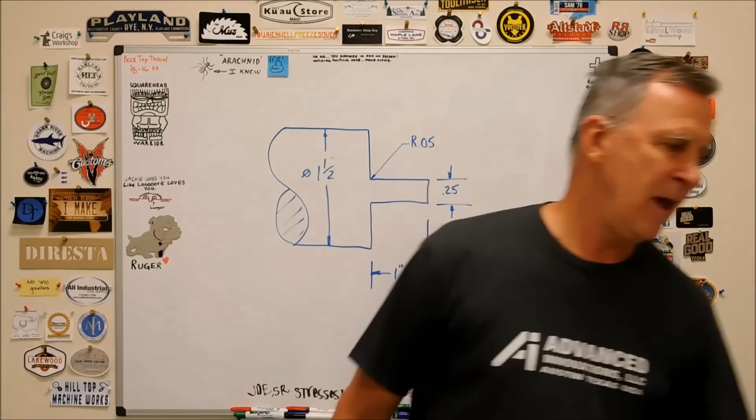All right, that being said, let's take a look at this piece behind me. 303 stainless steel, 1.5" diameter material. You look at it, you say, okay, I need a 1/4 inch nose on it, 1 inch long, whatever it works out to, coming down from 1.5" diameter material.

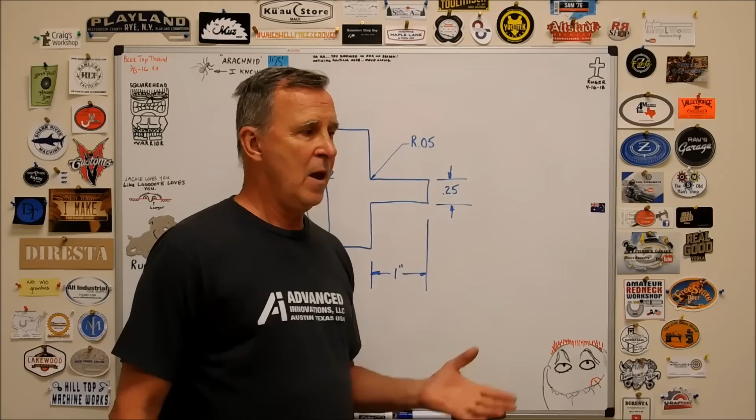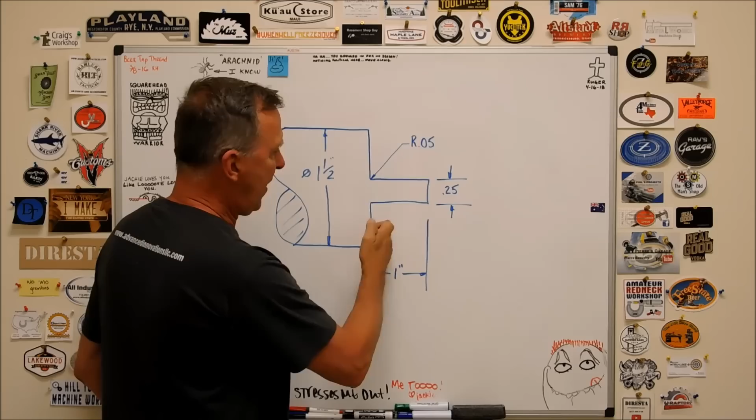At this point, you have to look at this and figure out what is the best way to approach this. If this was a very short projection, you don't want to take 99 small passes this way to get to that projection. You want to take one good pass this way, right? Makes sense. Why take 100 thou deep passes and take 9 of them when you can take 100 thou deep pass this way and go straight across to it? It's an easy part to do. Stock size, 1/4 inch fractional, inch long fractional, 50 thou radius, piece of cake.

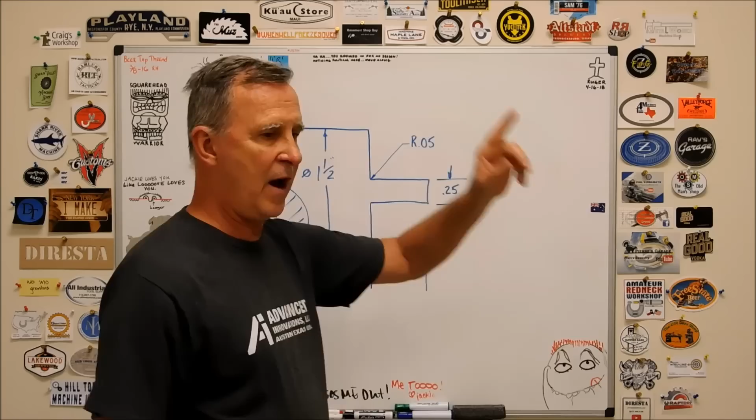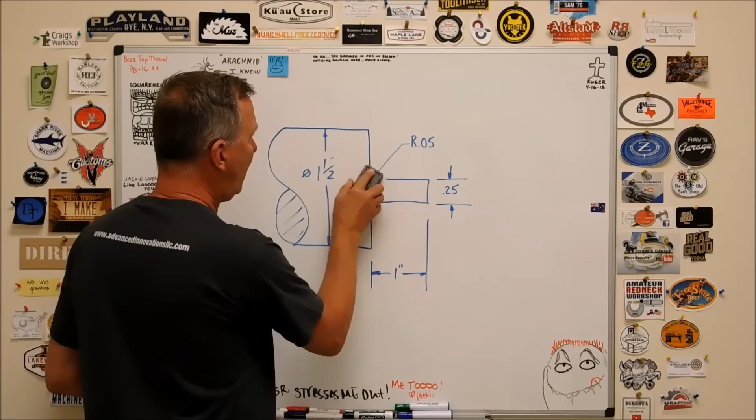Well, it was a piece of cake until the engineer realized that he dropped the decimal point and things are about to get fun. Here's the problem. That is no longer a 50 thou radius. Mr. Decimal Point is going to make his ugly head known, and here we go. It is now a 500 radius.

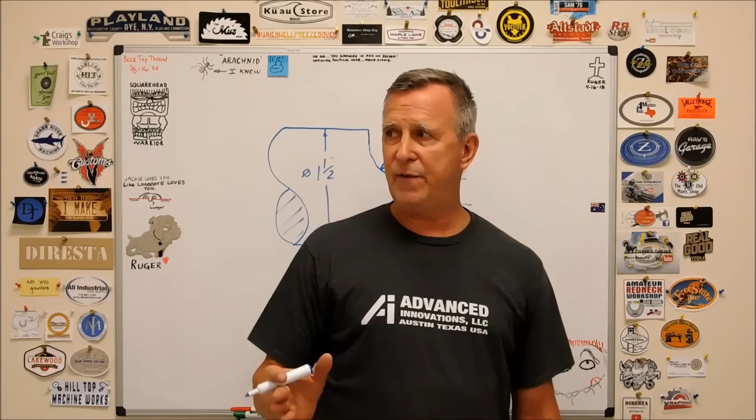Oh, 500 radius. Now all you guys with the Sherline machines, not that they're a bad machine, they're not, they're light, but you're not going to put a 1/2 inch radius form tool in a small hobby lathe and cut that radius. The machine's going to jump off the table and run out the door going, I didn't sign up for this. Well, you can do this.

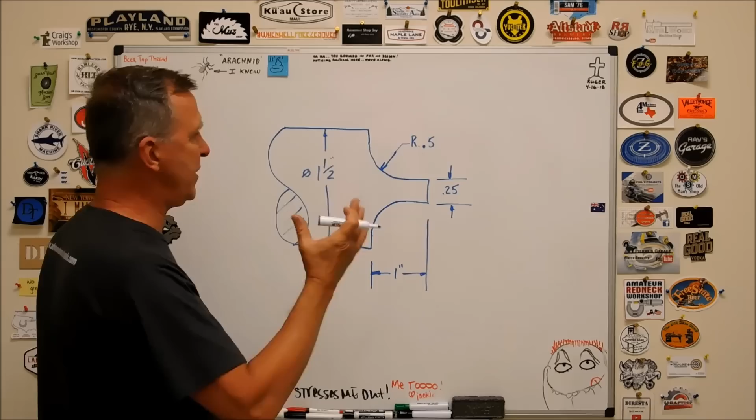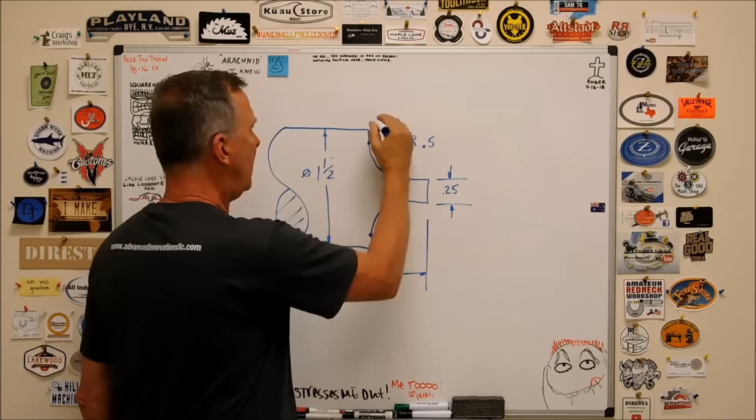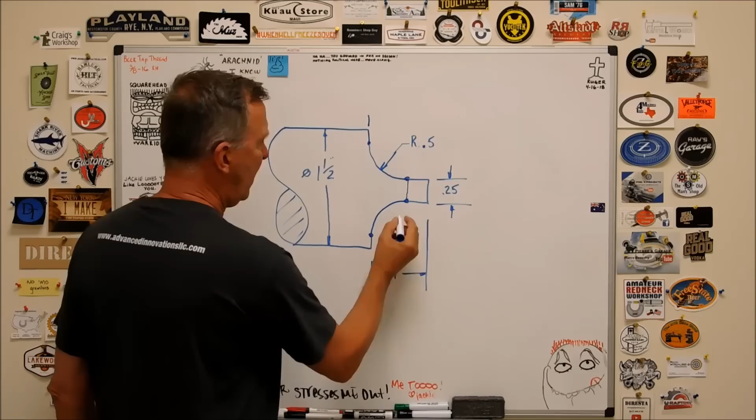There is a technique. Now the first thing I look at when I see a part like this, and I know that you have large contact and you do not have a CNC machine, you have to start breaking this part into features. You have a cylindrical right here. You have the beginning of the radius, you have the end of the radius, and you have a vertical surface here. Okay, now we're looking at pieces. If you have the time, which I doubt that you will, you can break this up into steps, stagger it, and then just start picking off high spots and you're good to go. But the easiest way is to just take the size of the radius and leave that material on.

Alright? That's the easiest way to do it. And then grab the form tool and start picking away at this square. Now you're going to say, well, it's not going to make any difference. I still have a full contact surface while I'm cutting that. Well, somewhat true, but not until the very last moment will you have all that contact.

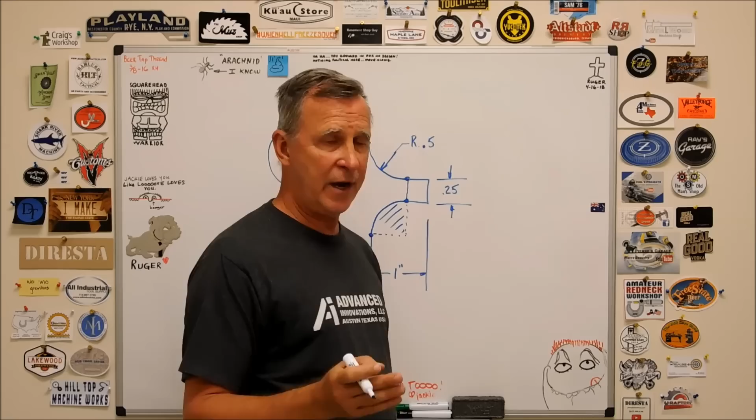You can actually put that radius on there, nibbling away at it, and we're going to walk out to the machine. I'm going to show you how it's done because it's a good trick. It's a good technique. It's a good solid technique. What you don't want to do is wipe this completely out of your mind. Do not take that 1/2 inch radius form tool

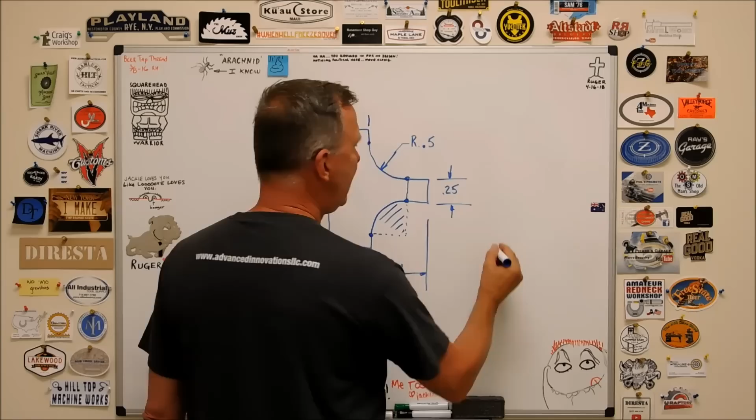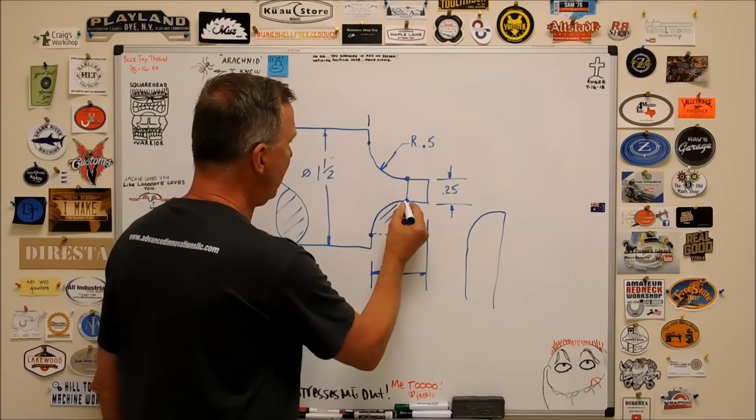and cut that feature with that on a light machine, because all you're going to do is swear and curse, and you're going to have to take 5 thou deep passes, and when you get down here to the full contact area, it's still going to jump, chatter, bang, and burp, and you're going to go 50 thou would have been a lot easier. So take a walk out to the machine. I will try to show you clearly what I'm doing, and hopefully you're going to learn something. Let's take a walk.

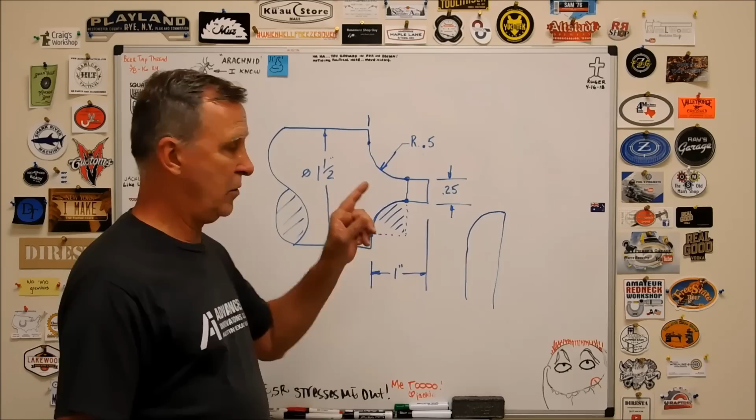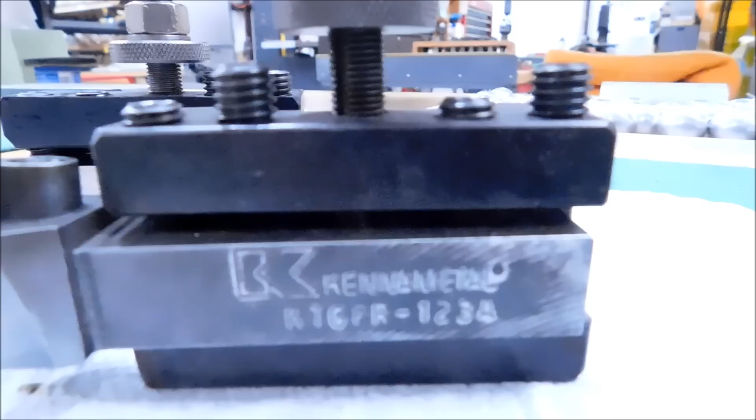Alright, because I know you guys are going to ask, these are the stars of the show. This is a TPG 321 triangular insert I'm using right here with a KC 730 coating on it. Now, this is a Kennametal tool, and I know a lot of you guys have tried to find this particular tool, and that is a KTGPR, I believe, 1234. But pretty sure Kennametal has discontinued this tool. This is one of my favorites, but they still do the TPG 321, 322, 323 inserts. So if you're looking for one of these, Hertel, H-E-R-T-E-L, I believe is the substitute manufacturer.

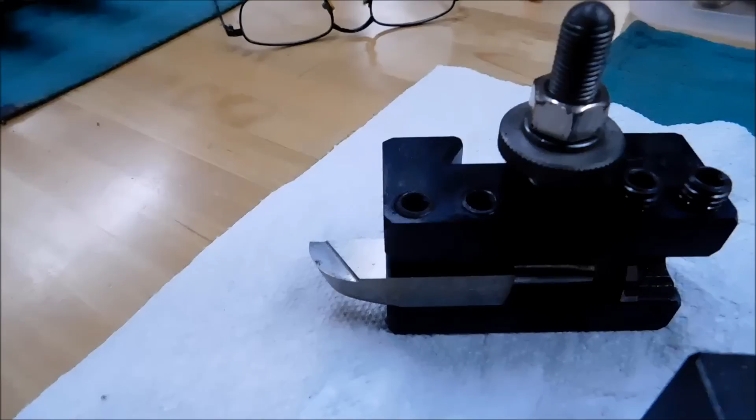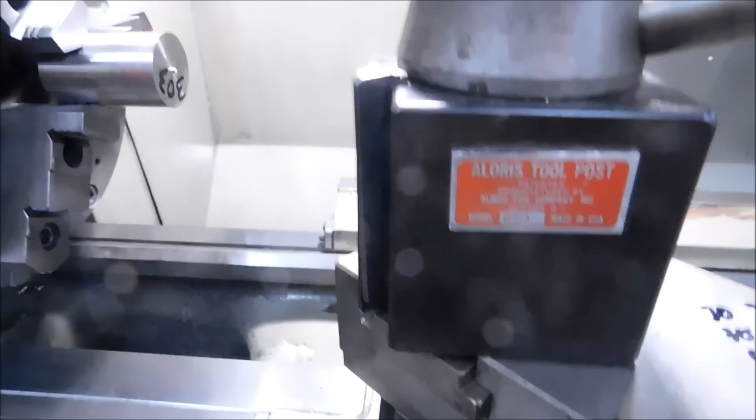Notice the projection is kept to a minimum. And same thing with the high-speed 1/2 inch tool. Projection is kept to a minimum. Choke up on the tools as far as you can. That will really help to eliminate chatter. Now the setup itself. This machine is currently set for another job, so I'm not going to be messing with the block, but ideally you want everything over top of a support surface. Do not have this top of your compound extended. Alright, try to choke up everything, keep everything as compact as possible. Have minimal projection on your part.

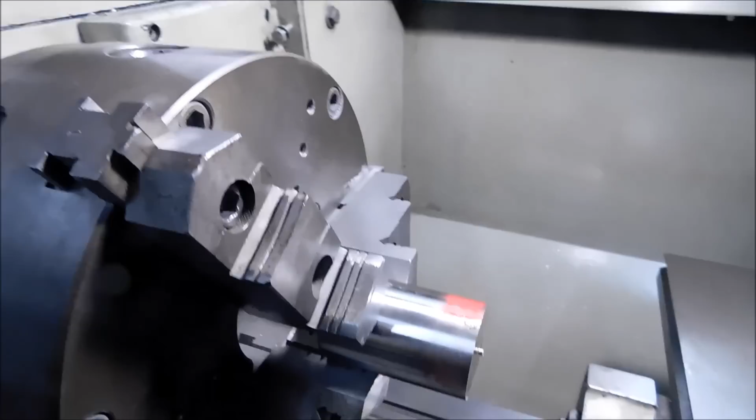And this type of job is the type of job where a 6-jaw chuck would be absolutely fantastic, because the 120-degree separation in between the jaws on a 3-jaw chuck just lend itself to a weak spot times three, and all that's going to do is invite chatter into the part. So let's be careful. I am going to run this job at 770 RPM with about a 7 thou per rev feed rate on this TPG. And I'll tell you, this thing will just peel this stainless off of here like it's butter. So let's reposition the camera and get this going.

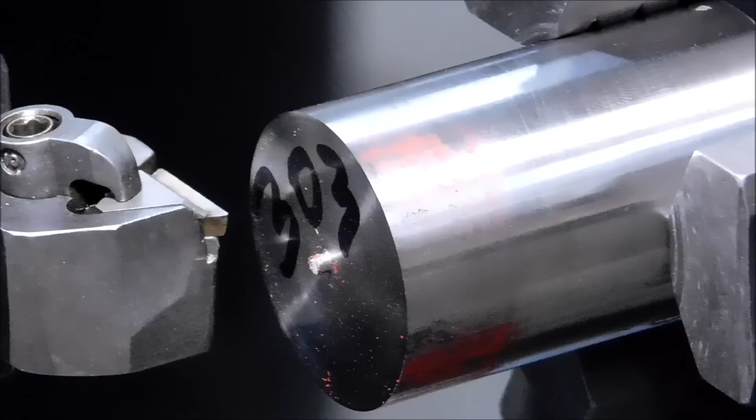Alright, very first thing I'm going to do is establish a flat face. I will face this off, zero out my digital, and then I'm going to turn an 1¼ inch diameter. I'm going to probably leave it a little bit bigger than an 1¼ inch by an 1¼ inch long, and then I will back the tool out 520, 530-ish on the carriage, and then we're going to get it down to the 1/4 inch diameter, leaving a 1/2 inch step, symmetrical 1/2 inch step where the 1/4 inch meets the beginning of the radius. Then we'll switch over to the radius tool and change the camera angle, because I want you to see what's happening, and that's the whole idea behind this. So hang in there for a couple of seconds, let the chips fly, and we'll get it going.

100 thou deep passes, 770 RPM. Except for the facing cut. Everything else will be 100 thou deep.

Okay, note to self, if you have a piece of raw stock that has been cut and it's not really cut straight, don't worry about facing the entire face off clean if the diameter you're worried about is 1/4 inch in the center. If that 1/4 inch in the center cleans up, who cares what the saw cut marks are out here? It really doesn't matter, and it'll save you material in the long run.

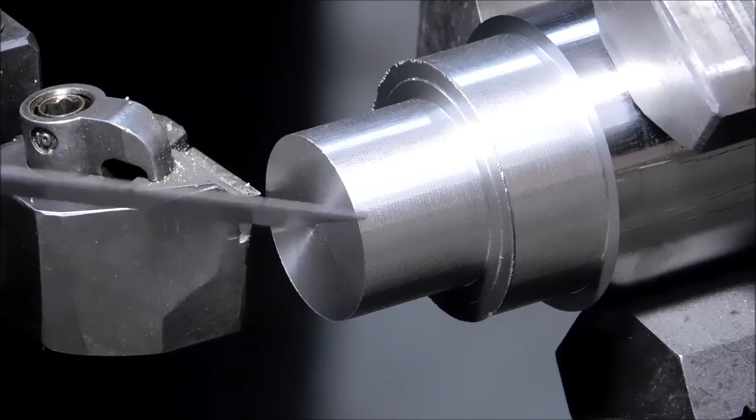Okay, now I think it is worth mentioning that the cut performance is going to change as the tool proceeds towards the center of the part. It's what they call a surface footage differential or surface footage change. It's not constant like you would find on a CNC lathe. On a CNC lathe, the RPM would increase as the tool got closer to the center to keep that surface

footage constant. Now the best way to describe that is take a 50-foot rope and put your buddy on the end of it and send him 50 feet away, and as you spin, he's going to run a lot faster to keep up with you, right? You're going to be doing the same RPM as he is, but he's going to have to go like a bat out of hell in order to keep up with your point in time wherever you are. Same thing's happening here. The larger diameter, the more material's coming around in the same period of time as the smaller diameter. So if you start having cutter performance issues as the diameter gets smaller, increase the RPM.

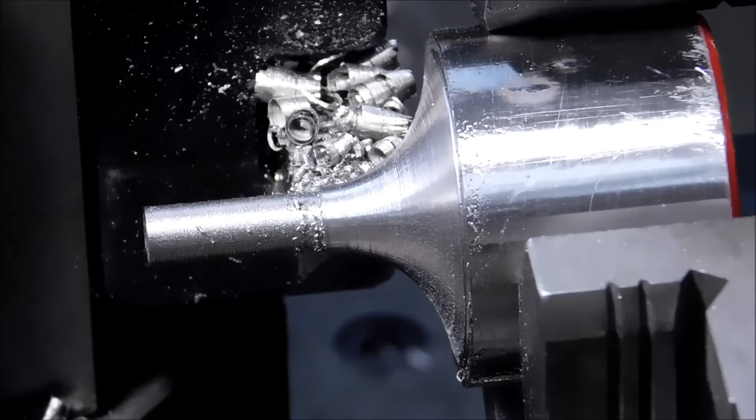And once you know what your numbers are and where you're going, hit those final numbers ever so quickly. Momentarily keep your hand on the cross slide and the hand wheel, and in a coordinated effort, hit your numbers and get out. Do not sit there. If you sit there, it's going to scream and the cut's going to go deeper and you're just going to have a mess.

We're going to have to do some hand work on this because I want a mirror finish when I'm done, just because that's what I'm looking for. And if you don't take the form tool out of the machine and address the cold fusion that gives you those tear lines, well, they're going to be there right until the end, and you're not going to get them out without heavy emery or file. And you can see that little intermittent blip in the film right there. That was the jogging going on in order to take off the chatter.

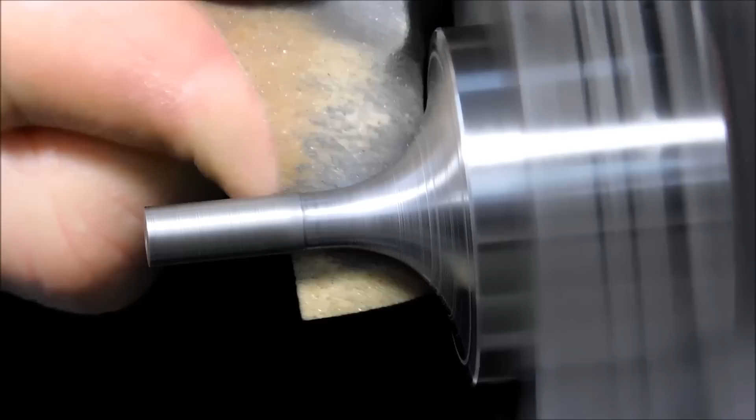This would be a much more successful operation in a 6-jaw chuck or bored soft jaws. Let's throw a little chamfer on there and start with the emery. Okay, the tear lines that you see in the material, this is no good. When you have a really nice finish and you start getting these gray lines in it, take a look at the tool that you're using, because there's a very good possibility that the tool is damaged or you have a cold weld situation.

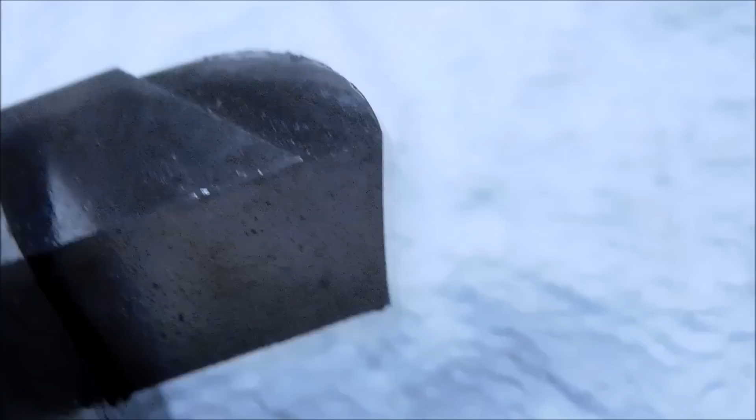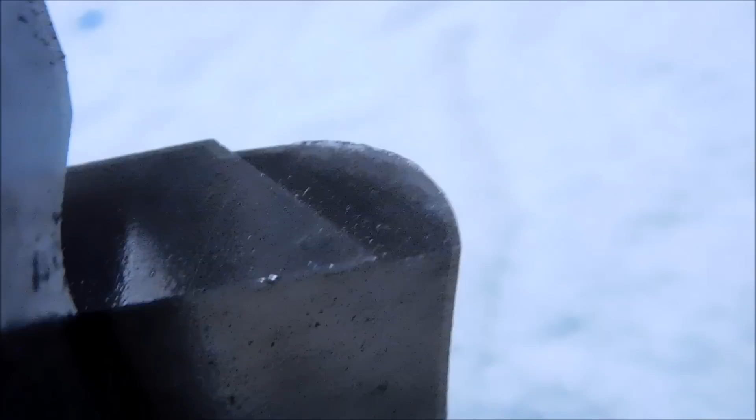Okay, now you can see by the edge of this tool there is some cold welded material on there. Right dead center, right on the very tip back here. See it? You can feel it too. Take a file and knock that off. You can take a stone and stone it down. But sometimes once it gets on there from a dry operation, because I didn't feel like sucking smoke for this whole demonstration, but for a dry operation like that, you can expect that to happen. And if you try to knock that off on a piece of carbide, you may take the edge of the carbide with you. So be careful when you remove it.

Now, old timers, forgive the terminology here, guys, but old timers used to call that fly shit. And once that gets on a part, it is really hard to get off. What I will do now to this part, and you can see the result of that cold fusion, tears those little gray lines in it, I'm going to hit this with a round file, and as I file this, I am going to be spinning the file so that the track of the file does not clog up. It probably will still encounter some debris, but if you do not spin it, you're going to have a problem. Alright, so let me shine it up, and I'll get back.

Alright, to finish this feature out, I'm going to use a round file. And it's really important to take a good hard look at how I'm going to do this. I am leaning on the headstock of the machine. I'm going to protect the tip and the handle of the file. And pay attention to how I'm rolling this file to keep this file from loading up. If you use a file like this and you just go right at it, naturally you can sweep the radius of the part with it, but chances are it's going to load up pretty quick.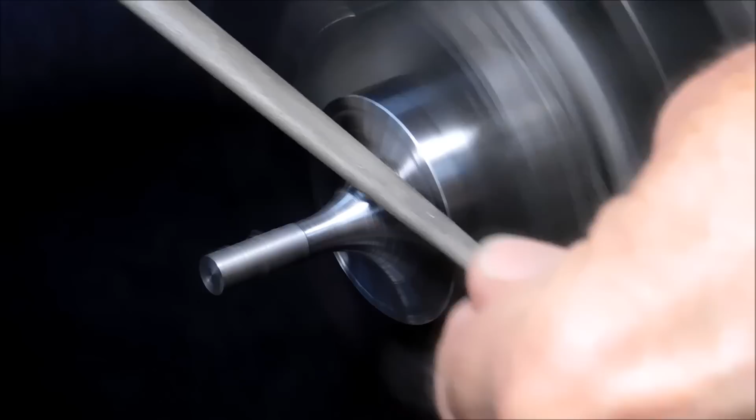Now, if you were to take a screw and turn a screw clockwise into a right-hand thread hole and drive it in really quick, it's going to slip right in because the helix of the screw matches the hole. Easy, right? If you were to turn that screw in reverse and drive it into that hole, well, you're going to meet with a whole lot of resistance. And that's the same exact thing that happens with the helix of a round file. You can almost neutralize the cutting action of the file by twisting the handle of the file as you traverse the part. You want it to cut more, you go to the opposite way. You want it to cut less, you go with it. And believe me, you'll feel it.

Take a round file sometime and try it. You will feel the resistance almost like it sticks because it's cutting, and that's your resistance. Throughout this particular demonstration, I went both ways on that file, and you can see it if you're looking for it.

It's something I do naturally, and if you want a deeper cut, go against the helix of the file. If you want a lighter cut, go with it, but just go nice and slow. The speed with which you push it across the part also changes the cutting performance. Jack up the RPM a little bit, start moving in with the emery. As soon as you hit the emery to the part, you're going to see anything you may have missed with the file.

I think the radius looks pretty good on this one, but we still have a little bit of a witness mark. With further investigation, I found that OD witness mark, the one on the face towards the outer edge, is from a top relief on the radius tool that was not intended to cut beyond the profile of the radius. So that got me, and I will clean that up. If you see it go away with no particular explanation, well, it made me crazy, and I just couldn't deal with it because I have to look at this part for a while.

I'm also going to take the TPG tool, and I am going to finish off the nose of this part so it blends real nice. And one thing about those TPGs, if you go in reverse with that tool, the back side of a TPG insert is always sharp because you're always cutting with the face of it. So it's almost like having a roughing and a finishing tool all in one.

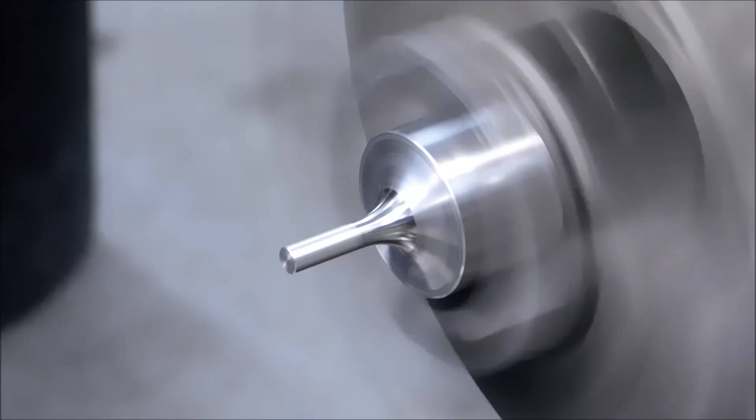Off camera, I tweaked the radius tool a little bit, came back and took a facing pass, and finished off the nose with the back side of the TPG insert, which is really nice because it's always sharp. Going to attack this with some emery. We're going to work down from a heavier grade into a smaller grade. That's about a 150. You can see we still have some tear lines in it, but if you work on those and don't keep the emery sitting still, you should be able to work them out pretty easily.

They're only a thou thick, but I tell you, on a large surface like this, 1/1000th of an inch is forever trying to get that out of there. But rest assured, I will get that out of there. This is accelerated footage because if you want a nice finish, you've got to take your time on it. That is a 2-inch emery cloth that I'm using there, and I don't prefer cloth on a lathe. I like paper on a lathe because if it grabs, the paper just detonates and it doesn't hurt you.

We're going to work our way through the emeries. If you like what you see, make sure you get all the dust off from the emery operation before you put any kind of a polish on. And once you put the polish on, it is payday. So this should be a pretty nice looking part when we're done here. This is Blue Magic Polish. I've been using this for a couple of weeks now, and I'm really liking it. You can see how it brings the shine of that stainless out like it was chrome plated. Love it.

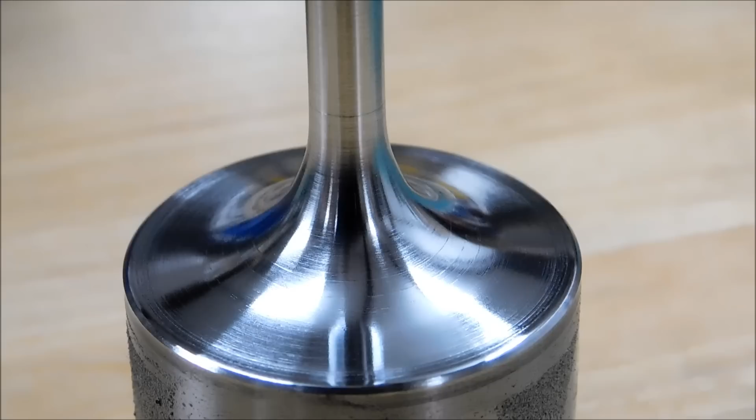Okay, now that is a considerable radius. I don't care which machine you have. If you're doing that manually, stepping it in like I showed you, chase the points around. It doesn't matter if it's 1 point, 2, 3, however many you make. Chase them around and keep cutting them off. Try to keep as minimal contact from the tool in contact with the part as you can until the very last geometry needs to form.

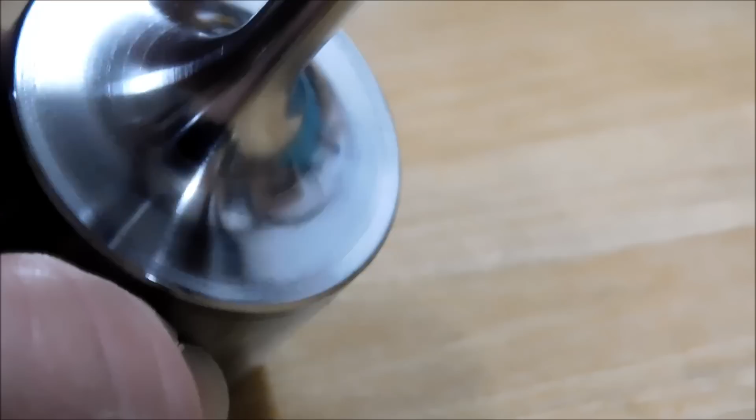This was finished off with a light hit on a fine round file. There are still some superficial lines in that. You can see them right around this area right here. They would come out relatively easy, but it's just redundant video time. Hit it with a 180 emery, went to a 400 emery, and then went to a Blue Magic metal polish for that.

Done with a paper towel, because a paper towel tears and pulls out of your hand a lot easier. If you use a rag, chances are the rag is going to offer up a little bit more resistance if the jaws catch it. So use a paper towel or a piece of tissue paper, napkin, Kleenex, whatever you got. That's how you do it, guys. Step it around, leave the material on there as you see fit, jump it point to point to point to point, finish the radius. It is possible.